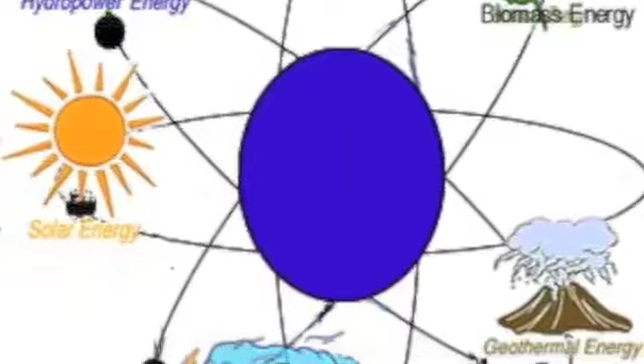By the first decade of the 21st century, wind energy has become the best hope for alternative energy. Compared to other alternative forms of new energy sources, wind energy found itself as the fastest growing alternative energy in the world, generating energy to several European countries and the United States.

This alternative system of wind energy is actually a form of solar energy created when the sun's radiation heats the atmosphere unevenly, causing air temperatures to vary. The effect of hot air rising to reduce atmospheric pressure on the Earth's surface and cold air descending creates wind currents, along with the help from regional temperature and the Earth's rotation.

Europe was the primary leader in this new era of wind development until the beginning of the new millennium, when the US more than doubled its wind electric generation, overtaking Germany as the world's top energy producer in 2008.

This multi-billion-dollar industry of wind was once used by ancestors to propel boats, pump water, and to mill flour from grain. It's one of the oldest sources of power used by men that has developed over time and is currently being applied to a new mission, transforming mechanical power into electricity with revolutionary success.

When humans first harnessed the energy of the wind, applying it to do work is unknown, but historical wind power was primarily used for transportation.

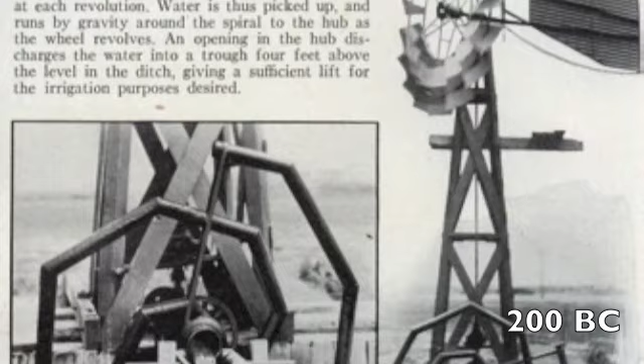The Egyptians used wind energy to propel boats along the Nile River, innovating linen and papyrus sails as early as 3100 BC. By 200 BC, in China, the simple structure of windmills were being used to pump water.

Meanwhile, in Persia, the woven reed sails of vertical axis windmills were grinding grain and lifting water from streams to help irrigate gardens. By 1300, the English post mill was replaced by the more powerful tower mill in the Netherlands.

These immovable brick or stone, wooden frame, skyward tower mills did more than just pump water and grind grain. They also drained lakes and marshes in the Rhine River Delta.

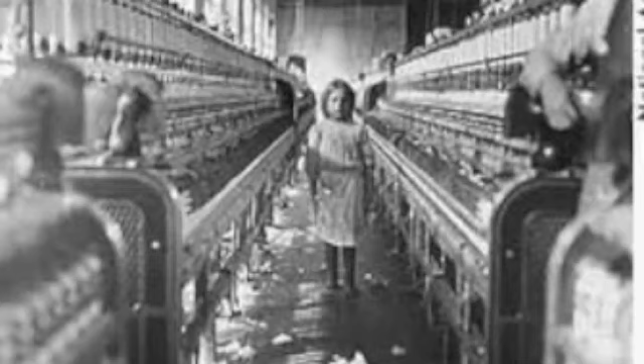Fast forwarding to after the discovery of the New World, despite industrialization in America, the advancement in electricity helped to spark the development of wind turbines.

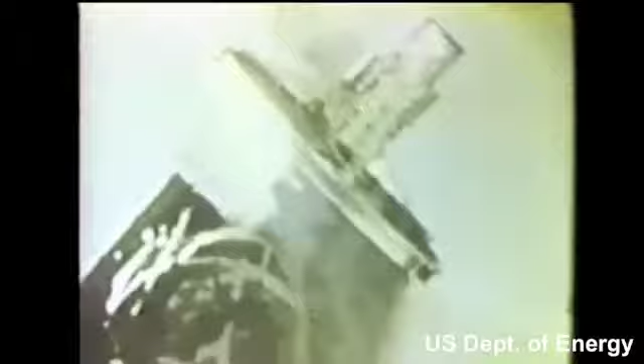Inventor Charles Brush developed the first practical large-scale automatic operated wind turbine used for electricity production. This led to the development of Palmer Putnam's largest wind turbine for the time, formerly known as Grandpa's Knob in Vermont. Towering above Grandpa's Knob near Rutland, Vermont, the Smith-Putnam turbine fed electricity to a Vermont utility company.

This system was designed to produce up to 1.25 megawatts of electricity. One megawatt equals one million watts, or enough electricity to light 10,000 100-watt light bulbs.

After the 1970s oil embargo, which caused concerns in regards to the energy supply crisis, there was a revival in wind energy. Ultimately, the converting of wind energy into useful power has come of age through improvements and appeasement in economics, thereby leading us into an age of modern wind turbines.

Modern wind turbines use aerodynamic principles to capture the wind's energy most effectively. There are two types of wind turbine classifications in terms of rotor aerodynamics, the first being drag type. That's when the rotor harnesses power from the drag of the airstream, acting parallel to the direction of the flow.

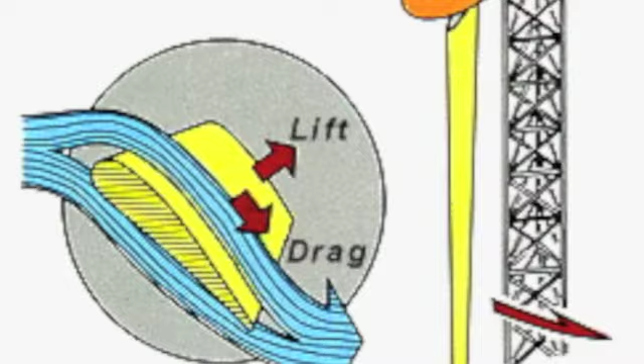The aerodynamic lift type has rotors that instead act perpendicular to the direction of the wind flow, but overall work together regarding the turbine. On the other hand, turbines have two basic structures, a horizontal axis wind turbine and a vertical axis wind turbine, with a third new innovation called a tether-based wind turbine.

The horizontal axis is a dominant technology in modern wind energy, achieving higher energy efficiency, thereby increasing power production. It has many advantages, such as being propeller based, having various means of control, meaning that the power output and rotor speed can be controlled by changing rotor pitch, rotor direction relative to wind direction, and blade angles.

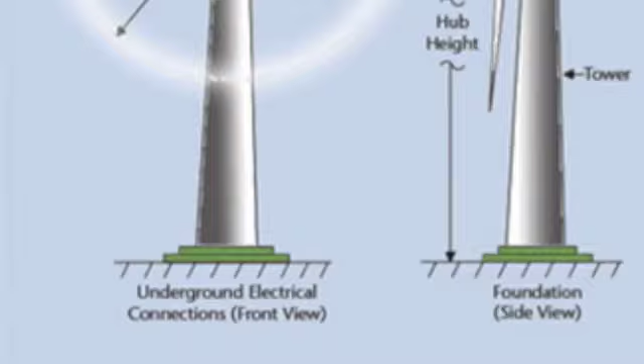On the downside, the electricity equipment must be situated right behind the rotor on top of these towers, resulting in higher energy costs in construction. Vertical axis wind turbines are currently used in small-scale wind farms, the oldest design being the Savonius rotor.

This rotor was a drag type and is no longer in use due to lack of efficiency. Following the Savonius rotor was the Darrieus rotor, designed in 1925, the first aerodynamic lift-type rotor, based on a complex shape to maximize energy output, but somewhat difficult to manufacture. The Darrieus rotor then evolved into the H-rotor, which has a rotor tilt for speed control. Although the structure seems simple, it's still not an economic competitor with horizontal axis wind turbines.

Back to the horizontal wind turbine, there are several parts: the rotor blades, used for capturing the wind's energy; the nacelle, which holds the gearbox, the shafts, the generator, and the brake; along with the tower and transformer.

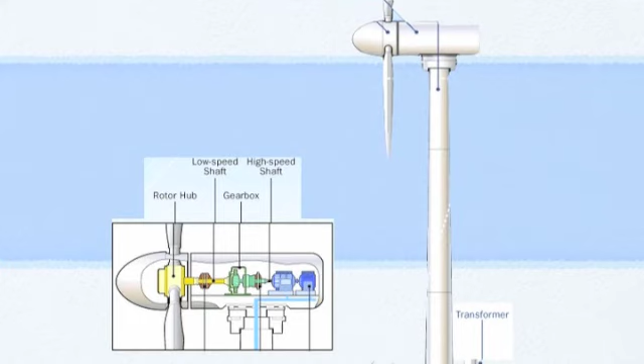Now let's see how it works. The energy in the wind is converted to rotational motion by the rotor. When the blades turn, the rotor turns a shaft, which transfers the motion into the nacelle.

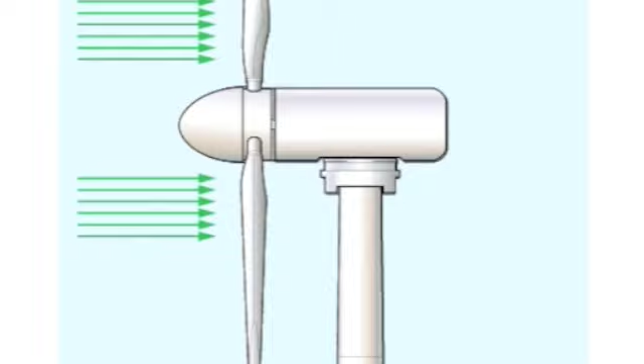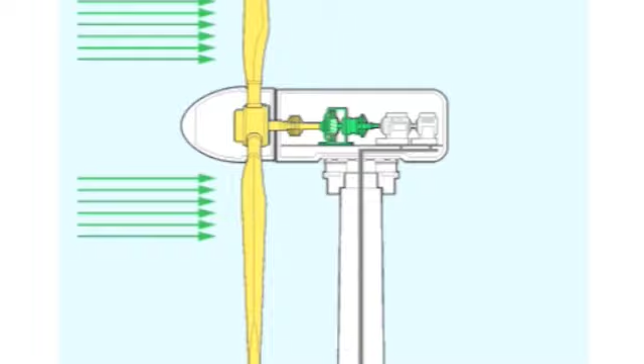The slowly rotating shaft enters a gearbox that greatly increases the rotational shaft speed. The output shaft is connected to a generator that converts the rotational movement into electricity at a medium voltage.

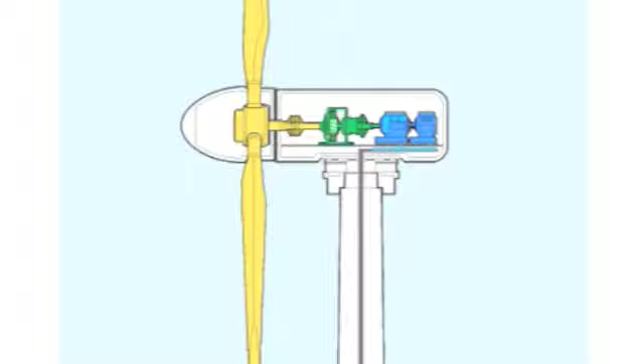The electricity flows down the heavy electric cables inside the tower to a transformer, which increases the voltage of electric power to the distribution voltage. The distribution voltage power flows through underground lines to a collection point where the power may be combined with other wind turbines. The electricity may be sent to nearby farms, resident towns, or substations.

It is believed that by 2050, more than 80% of energy should be renewable, with 20% from wind energy, a large fraction coming from wind turbines placed at fields or at sea. Wind farms are a cluster of wind turbines that act as one electricity-producing power station on a large scale. There's a high level of availability resulting from the reliability of the machines, determined by the location.

Offshore wind turbines are 40% more productive due to more frequent winds, but construction costs are twice as much as land-based wind technology. Meanwhile, Texas, Kansas, and Wyoming are the leading wind power producing states, out of 41,455 wind turbines in total in the U.S.

Wind energy is a renewable resource that emits no pollutants or greenhouse gases during operation. It does not require fuel, so there is no mining or drilling needed, as is the case for coal, oil, or natural gas power plants. Sounds like an environmentalist's dream, doesn't it?

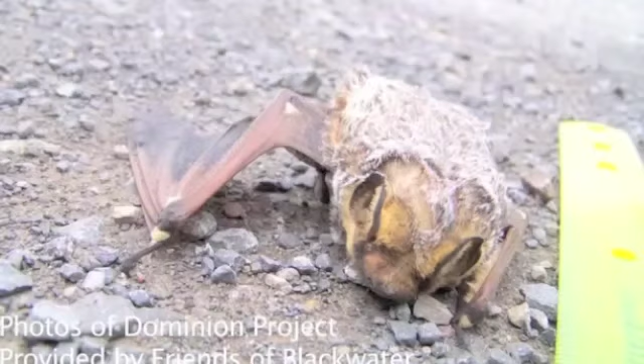Over 1,000 raptors die each year, and about 67 golden eagles as well. A study estimated that a single wind turbine kills, on average, 10 birds per year. However, comparisons with other man-made hazards such as buildings and glass, vehicles, pesticides, and hunting reveal that wind turbines represent a minor hazard. Bat fatalities are higher than bird fatalities at well-monitored wind farms.

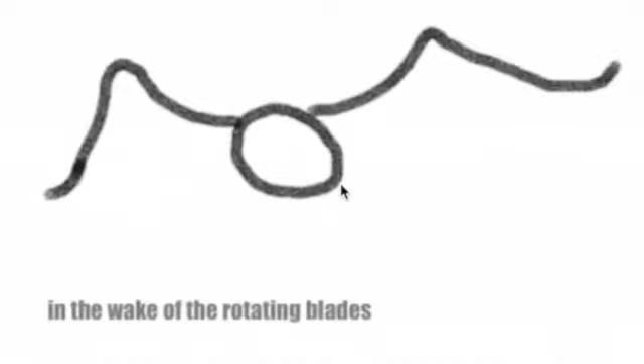Dead bats are turning up beneath wind turbines all over the world. Bat fatalities have now been documented at nearly every wind farm facility in North America where adequate surveys for bats have been conducted, and several of these sites are estimated to cause the deaths of thousands of bats per year. The death of these poor birds and bats is one major environmental problem that advocates for these animals are trying to help solve.

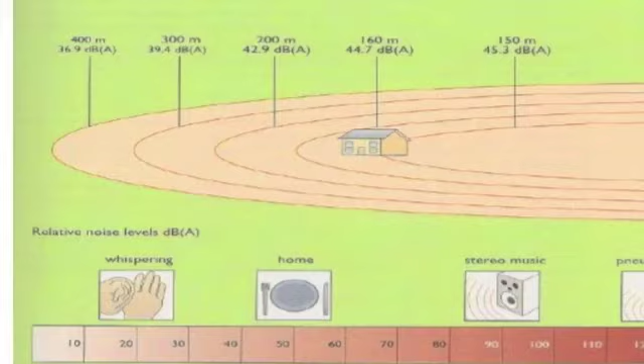Wind turbines cause electromagnetic interference via three principal mechanisms, namely near-field effects, diffraction, and reflection and scattering. Near-field effects refer to the potential of a wind turbine to cause interference to radio signals due to electromagnetic fields emitted by the generator and switching components in the turbine.

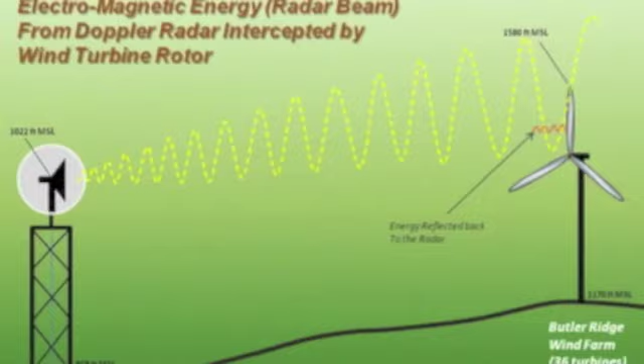Diffraction occurs when an object modifies an advancing wavefront by obstructing the wave's path of travel. Diffraction effects can also occur when the object not only reflects part of the signal, but also absorbs the signal. Reflection and scattering interference occurs when turbines either reflect or obstruct signals between a transmitter and a receiver.

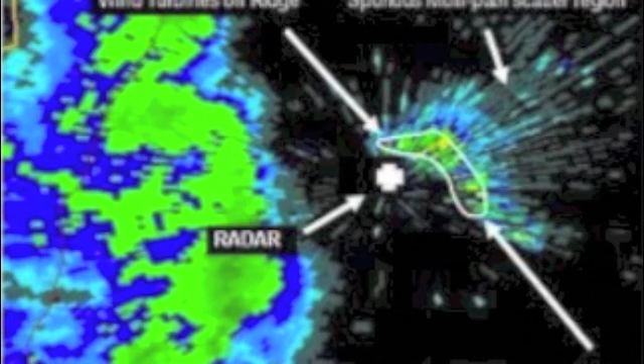This occurs when the rotating blade of a turbine receives a primary transmitted signal and acts to produce and transmit a scattered signal. In this situation, the receiver may pick up two signals simultaneously, with the scattered signal causing electromagnetic interference because it is delayed in time or distorted compared to the primary signal. These interferences can be a major problem in society, and this is why they are one significant environmental issue.

Since wind turbines are so good for the environment and do not pollute the air, they are overall better for your health than many other choices of energy. Oil spills are a major problem with petroleum that harms wildlife and animals, as well as all the toxins emitted when driving cars that pollute the air around us. Wind energy is a healthy choice for us as well as for our environment.

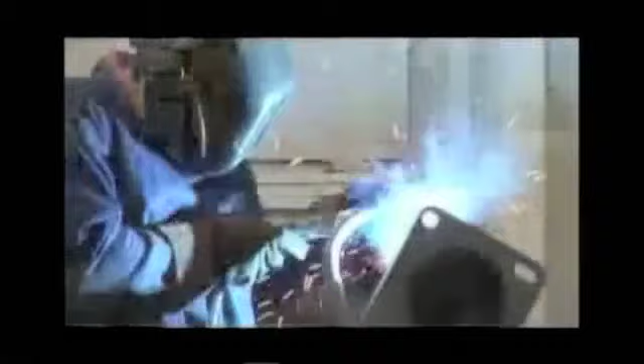Development of wind power projects can provide employment and training for many people in different categories. As the wind energy industry continues to grow, it will provide many opportunities for workers in search of new careers. These careers extend beyond the wind farm; it also takes the efforts of workers in factories and offices to build and operate a turbine.

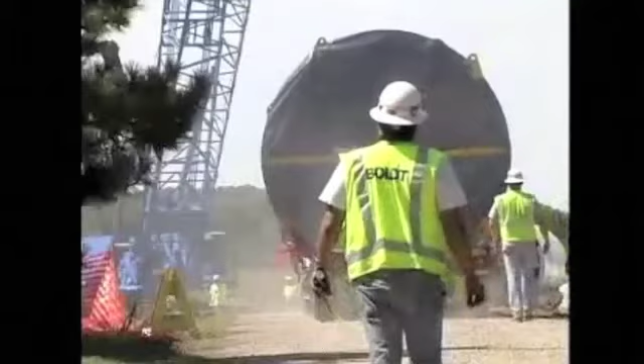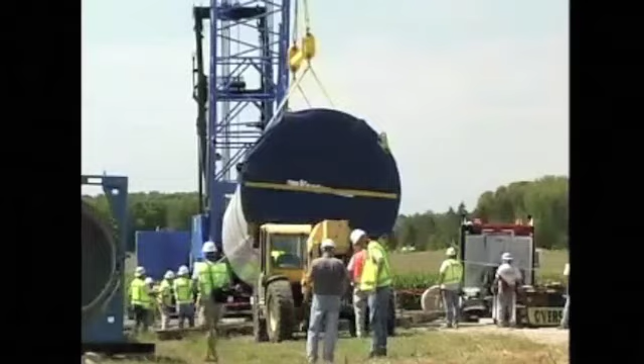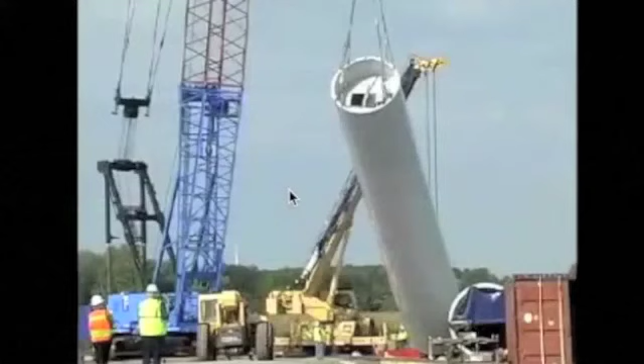According to the AWEA, an estimated 85,000 Americans are currently employed in the wind power industry and related fields. Many workers are found on wind farms, which are frequently located in the Midwest, Southwest, and Northeast regions of the United States. Texas, Iowa, and California are the states leading in wind power generating capacity, but many other states, including Illinois, Indiana, Oregon, and Washington, are in the process of substantially increasing their wind generating capacity.

Since taking office, President Obama has been focused on building an energy economy in the United States that is cleaner, as well as more efficient and secure. As part of that effort, the administration has taken historic action over the past few years to support the development and deployment of renewable energy that will create new jobs and jumpstart new industries in America.

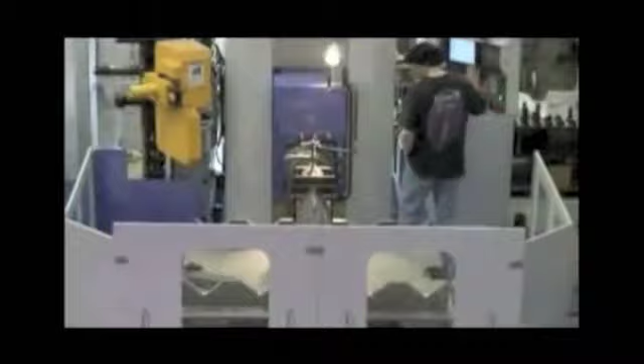We are making significant progress towards the American wind industry, which had its best year ever in 2012, with more than 13,000 megawatts installed. In the fourth quarter alone, more than 8,000 megawatts were deployed, an all-time record for the industry and twice as much wind as the previous record set in 2009.

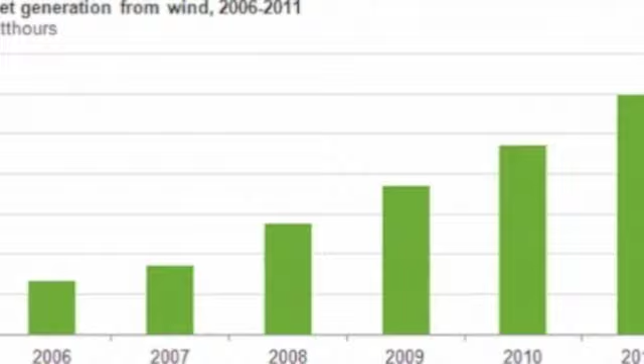All of this progress builds on the encouraging trends in renewable energy over the past few years. Since 2008, the U.S. has doubled renewable generation from wind, solar, and geothermal sources, and America is now home to some of the largest wind and solar farms in the world.